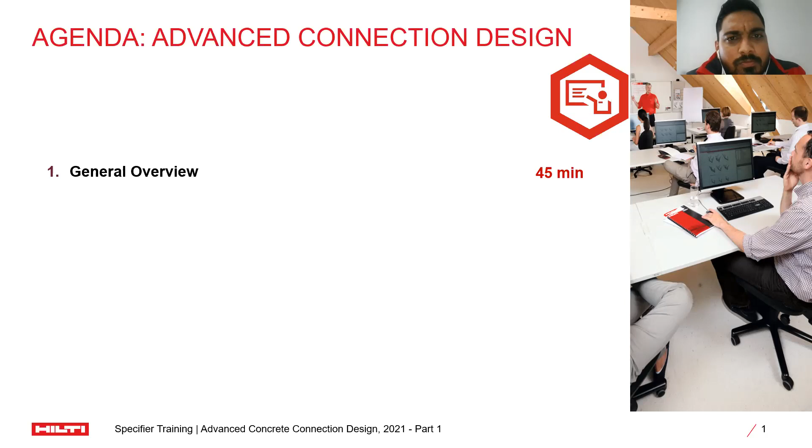To touch on what Paiman said, there's a code in the country now which deals with the design of fasteners into concrete. What I'll be covering today is part one of this overall very big and complex topic. The title of the presentation is Advanced Concrete Connection Design. This is part one, a general overview. An informal title can be Anchors 101. So before I start, I just want to tell you more about me and the company I'm presenting here on behalf of - why Hilti and who are Hilti.

I think it's a common perception in South Africa specifically that Hilti is known for power tools, and how are we involved in anchors and in connection designs and in codes and so forth.

I'm going to give you a quick background though, just to tell you where we came from and what we do. The company was created in 1941 in Liechtenstein, a tiny little principality on the border of Switzerland. It's still a family-owned business held by the Martin Hilti Family Trust. We like to consider ourselves one of the more innovative companies in the construction industry. We market products to building professionals, to the engineering community, and are now established in more than 120 countries worldwide. We have 27,000 employees in the company, of which 2,000 are engineers. I'm one of them, and we have a pretty unique sales model.

One thing you probably notice is that you walk into your typical hardware store and you don't see many Hilti products on the shelf. That's because of this direct sales model that we embody. It's about these kind of conversations, the introductions that we're having today, about understanding what our customers and clients' needs are and finding a solution to meet those needs. Some of you on the call might have seen us in and around sites, either our engineers or sales reps. It's hard to mistake who we are - we're generally wearing bright red shirts - but that's us in a nutshell.

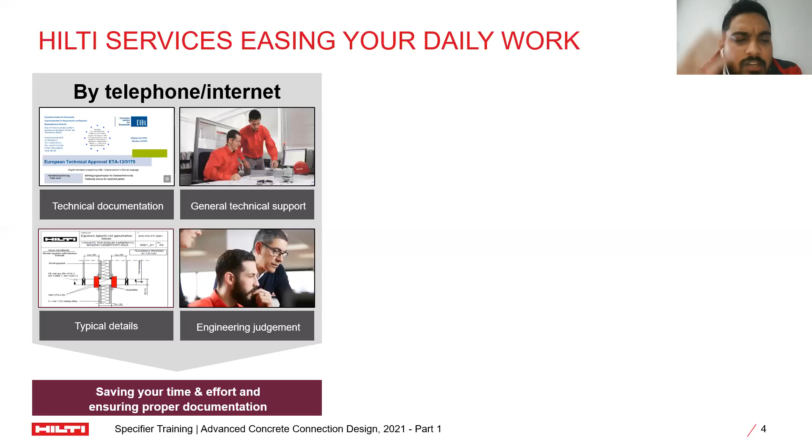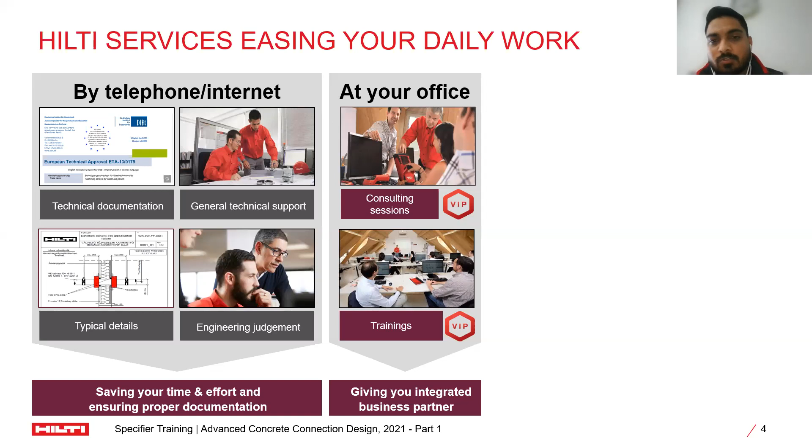Now, back to the engineering aspect of it. There's a few ways you can get a hold of us - telephone and the internet, you can go to our website, there's lots of information on there. This direct sales model leads to conversations that we can have with you at your office or trainings like these. And then on the job site, as I say, lots of bright red shirts offering support and training, and making sure that the solutions we offer are implemented correctly.

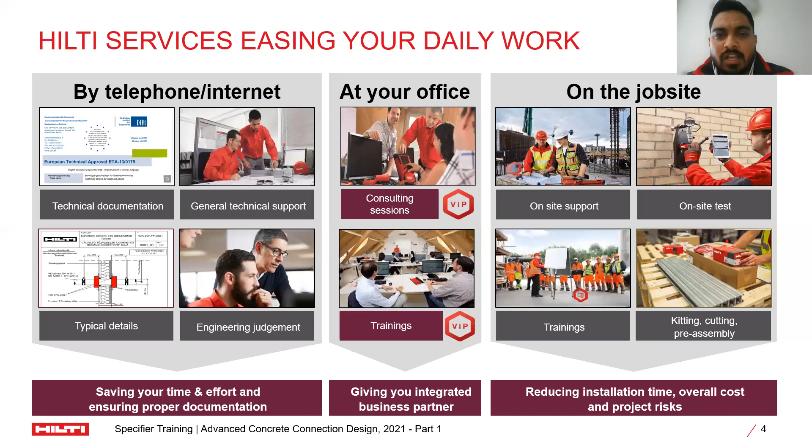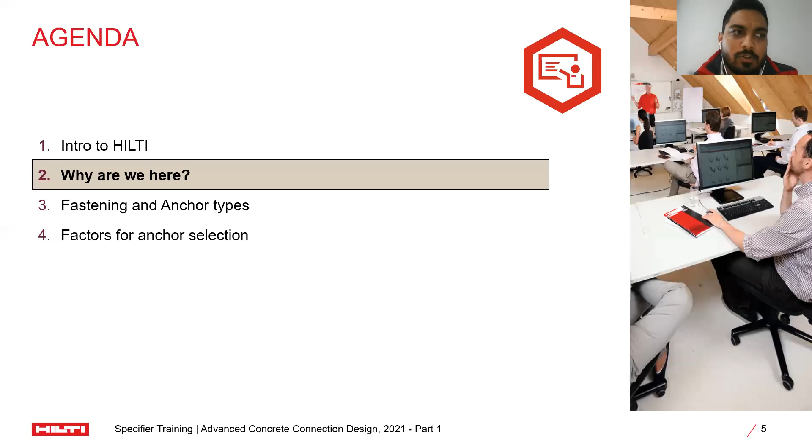Now, it wasn't us that pushed this code. This is actually something that came from a committee who's done a lot of hard work in the implementation of Eurocode in South Africa. They're still working on other parts, but how this specific Part 4 came to light was there's been a few failures, I would say, over the years from an anchor perspective that led to, unfortunately, injury, death, and damage. This resulted in this code being fast-tracked through the system and being implemented. The committee, as aforementioned, has been working for years to implement Eurocode. They roped in specific stakeholders in the industry - us, some of our fellow anchor suppliers - and together we collaborated and discussed what would be the best route forward. This code was then published in March.

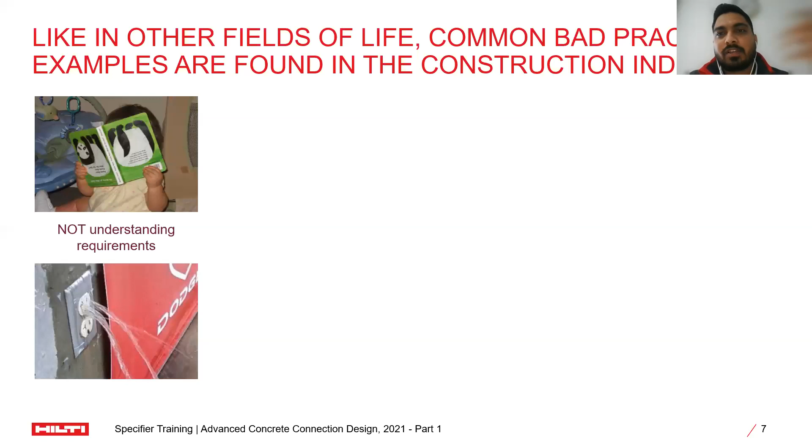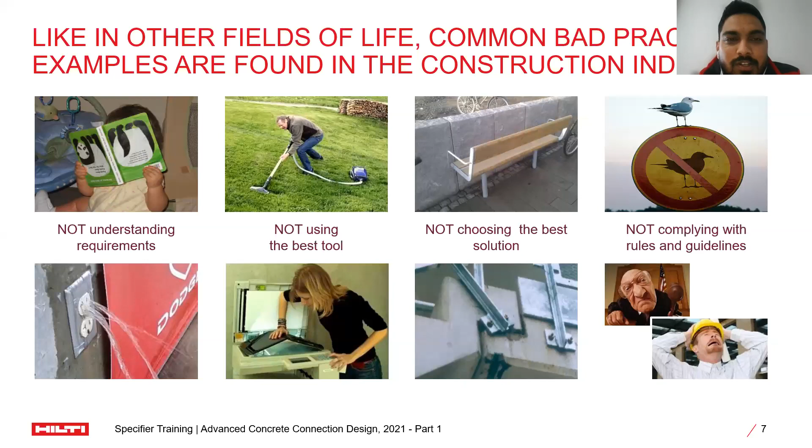Not understanding the requirements on site, not using the best tool, not choosing the best solution, and not complying with rules and guidelines for the aforementioned code. Now, none of these pictures were taken in South Africa, so I think we are ahead of wherever these specific scenarios occurred, but there's still a bit of things that we see on site that can be done better.

Now, with these many delegates on the call, I see there's over 400 of us here, and I'm assuming most of us are engineers, civil engineers specifically, and we realize that we can't make some of the mistakes that we saw in the previous page, because professional decisions do not allow doubts or mistakes, because the consequences can be very serious.

I mentioned before that anchor failure in the past has led to the implementation of this code, but we specializing in anchors at Hilti, I'm sure with you engineers out there, it's not just the anchors that you have to consider, it's everything surrounding that. It's the entire structure, and ensuring that we do things safely and do things per regulations is critical. Hence the reason that I wanted to start from basics on this topic.

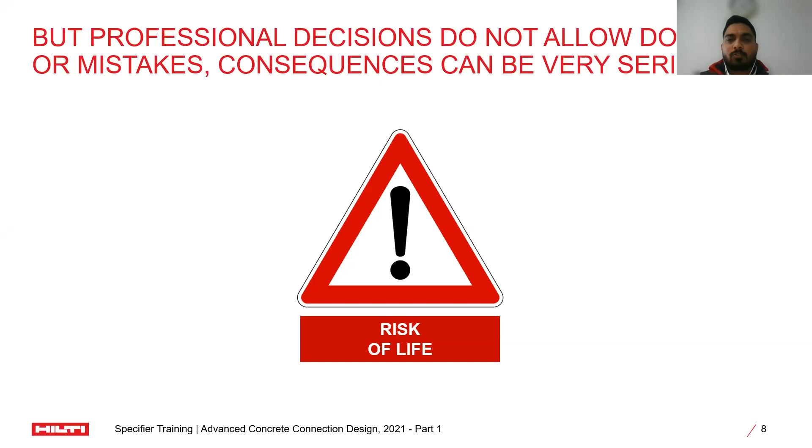Before diving into the code, it's important to firstly understand what are anchors, what are the different principles behind them, and how do we use them in the industry. So fastening systems can be split into two solutions. Cast in place installation, self-explanatory. The anchor or the fixture is cast in with the concrete when it is poured.

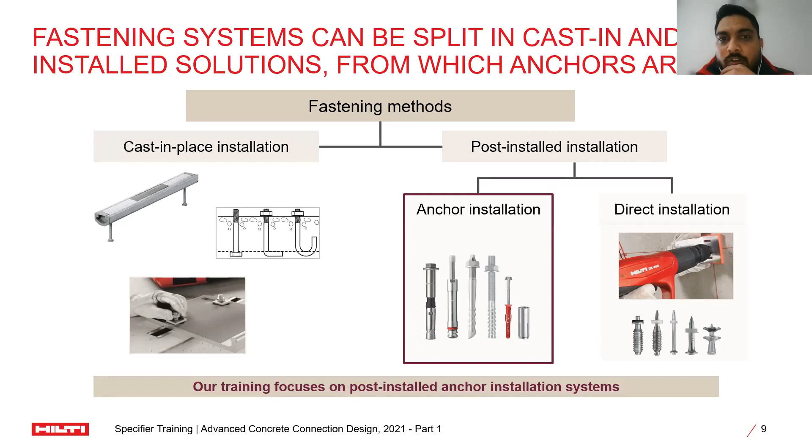And then post-install installation, which can be split into two criteria. Direct installation, typically your nail guns and what we at Hilti call direct fastening solution, where a fixture is shot into the base material. And then anchor installation or post-install anchor installation, which is the systems that we'll be focusing on during the course of today's session.

Now, most of you on the call would have looked at a data sheet for an anchor, whether it's a Hilti data sheet or any of the data sheets for any anchor out there. And you might wonder how these small, tiny little metal fixtures can resist such high tension and shear loads. Well, this resistance comes from three working principles: friction, keying, and bonding.

Friction: the tensile load is transferred to the base material by friction built up by the anchor expansion. I'll touch on that a bit more just now. Keying: during the setting operation, an undercut is created that transfers the tensile loads like a cast-in headed stud. And then bonding: the cured mortar mixture creates a bond between the anchor and the base material.

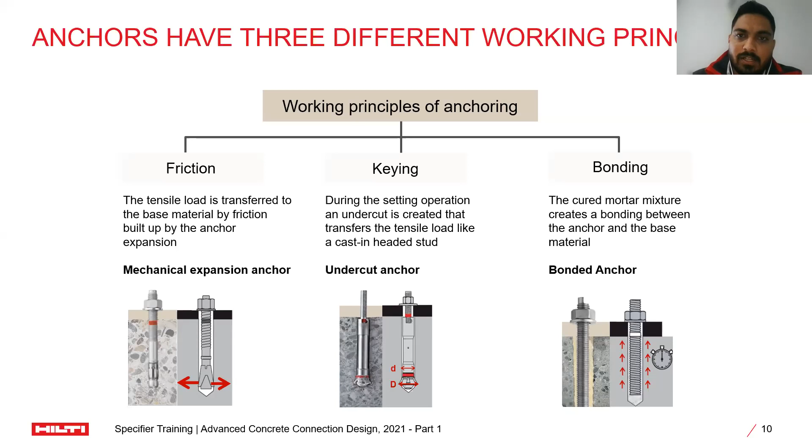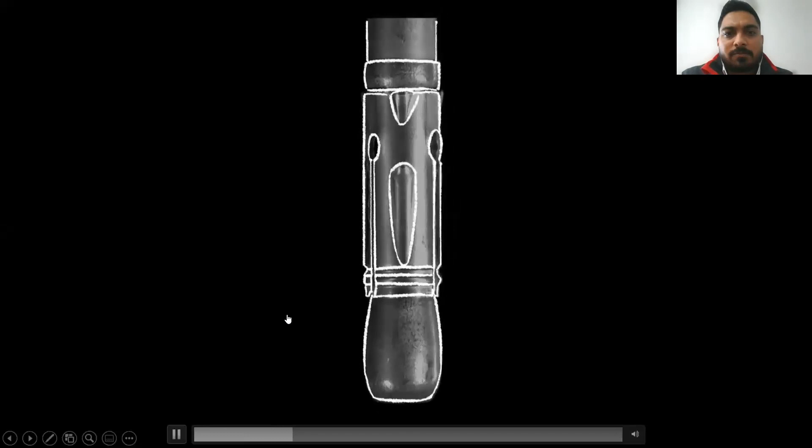Now I'm going to show you exactly how these principles work. I hope my video can be seen. Now, this is the friction principle. As you can see, there's a little metal element at the bottom of the fixture that expands as you torque this anchor. And with this expansion, it creates friction with the concrete, which gives this anchor its resistance.

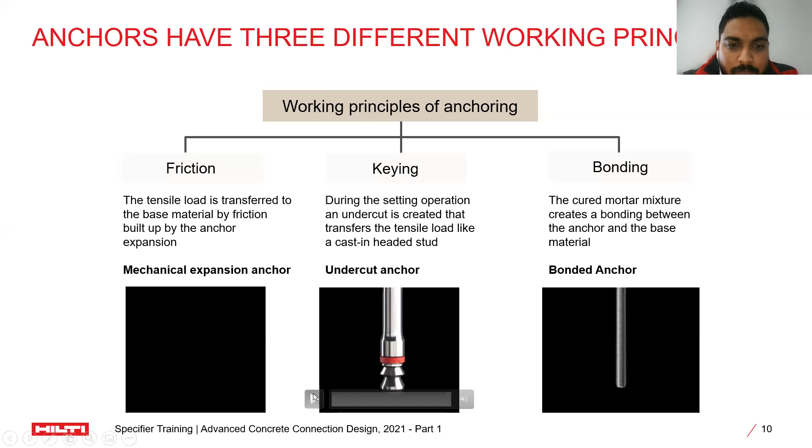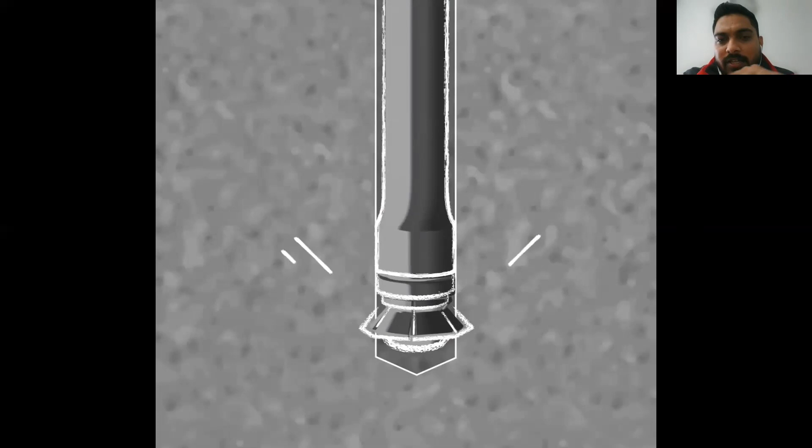The principle of keying, I'm playing a video now, has a sharper element attached to this anchor. And this sharp element, while torquing the anchor into the base material, cuts into the concrete and almost self-taps itself in there. And this keying effect gives it its resistance.

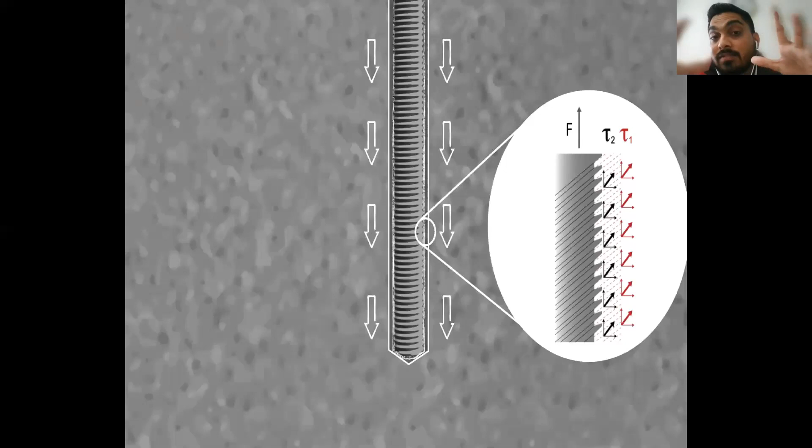And then finally, the bonding principle, which involves a metal element with a mortar. You first drill a hole, make sure it's clean, and install the mortar. And this bonding between the mortar and the metal element, and the mortar and the base material, gives the anchor its resistance. Now, two things I want to specify here before we move on.

We spoke about bonding and I mentioned cleaning. And this is going back to best practices and safe installations on site and doing the right thing if we understand it. A basic principle: the mortar bonds with the anchor, the mortar bonds with the base material. In order for it to bond with the base material, it needs to be cleaned correctly. And hence with any bonded anchor, whoever you're purchasing them from, you would see that cleaning of the boreholes is extremely critical, because dust can negatively affect this anchor.

It's the same on the friction side and the expansion side. I mentioned torque. The anchor expands with torque, and every expansion anchor that you might purchase or specify will have a torque requirement. If it's over-torqued, the anchor will expand too much and can cause damage within the concrete. If it's under-torqued, the anchor can displace, which could lead to failure. So a couple of safety requirements that you would need to look at when specifying and looking at these anchors on site.

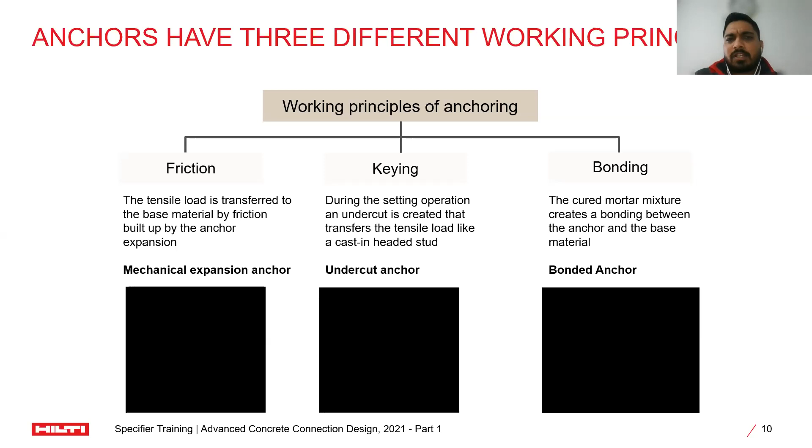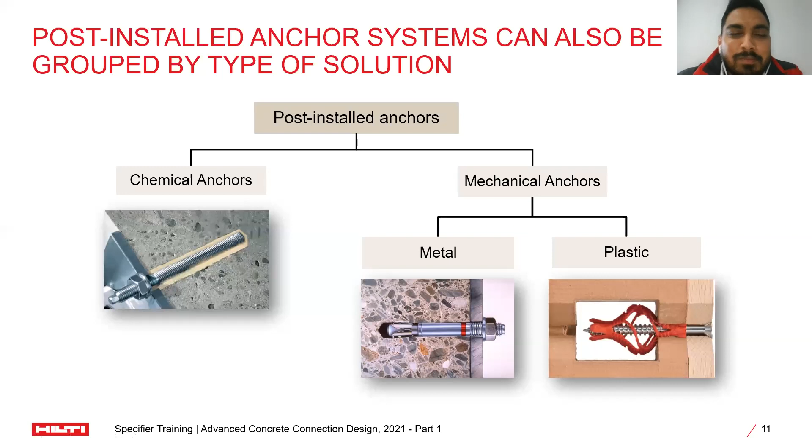Now we speak about these principles. We can also group them into two separate compartments. On the mortar side and with the bonding principles, we have chemical anchors, which is the common name out in the market there. Chemical mortar, chemical anchors, epoxy sometimes. And on the right-hand side, we have mechanical anchors, which can be split into two further categories. Metal anchors, more for your structural connections, and plastic anchors, typically non-structural, mostly to hang up wall frames and other stuff. Good.

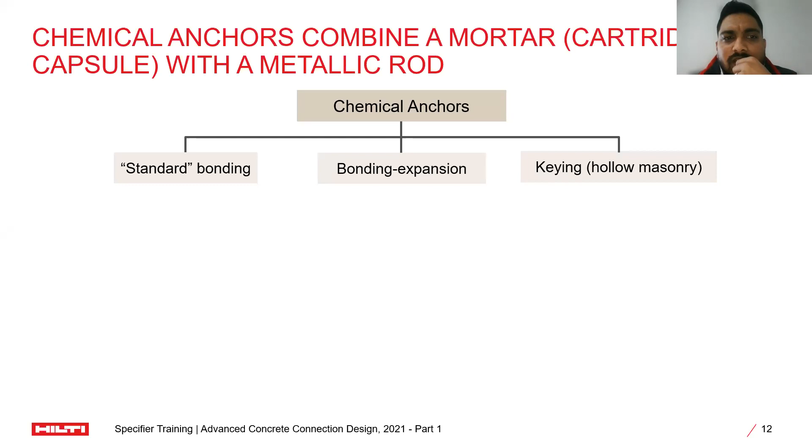Now, chemical anchors can be broken down even further. And I want to touch on this a bit more because there's further principles that we need to consider when assessing these anchors. There's bonding, right? We spoke about the fact that it bonds with the rod and the concrete base material. And this is almost like a technology in a way. There's a micro keying effect that occurs with specific chemical mortars. And this is based on the makeup of that mortar. It finds little crevices in the base material and it attaches itself to that. And through that bonding, you can get amazingly high load resistance.

Then there's bonding expansion. This is a fascinating principle and actually pretty new technology. You see the rod in these cases are not your typical threaded rods. What these anchors do is actually the rod itself, once torqued, breaks its bond with the mortar. And once the mortar is cured, when a tension force is applied, it pushes outwards. It pushes against the cured mortar. And this mortar in turn pushes onto the base material and gives it really good resistance.

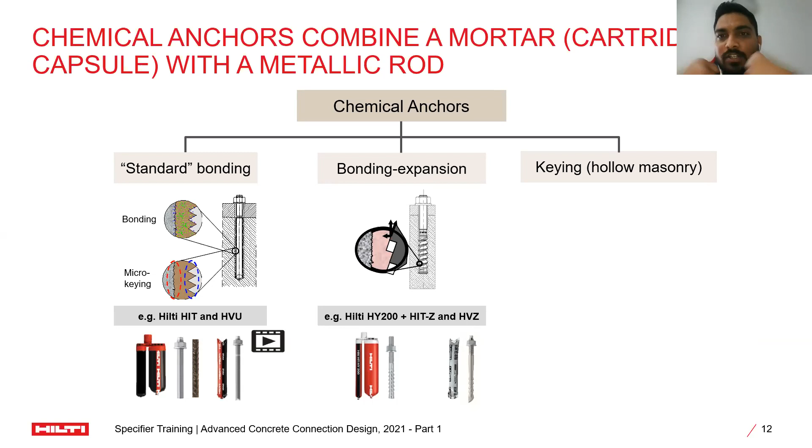There's a few anchors like this in the world, and these are the only chemical anchors, I should say, that you can actually use in an unclean hole, because it actually uses the principle of expansion and friction to give it its resistance.

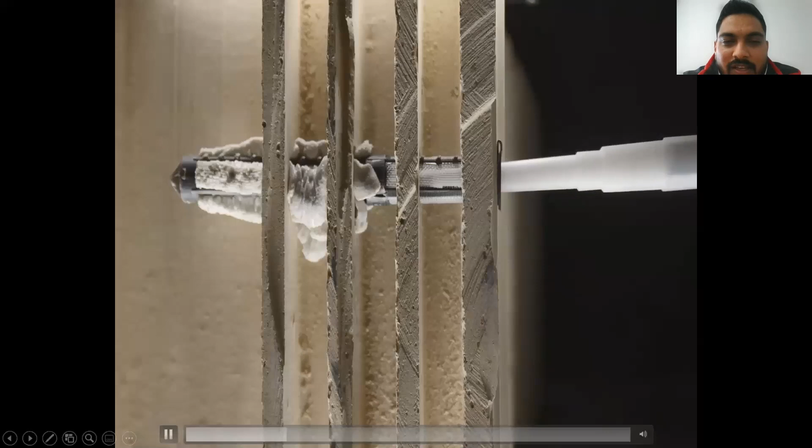And then finally, we have hollow masonry. I want to just show you a video of what this looks like, because this is a fascinating principle, because anchoring into masonry can be complicated sometimes. You generally need to consider the fact that there's crevices in there. And as you can see in this case, the anchor needs to be used in conjunction with a sleeve. And that sleeve is perforated.

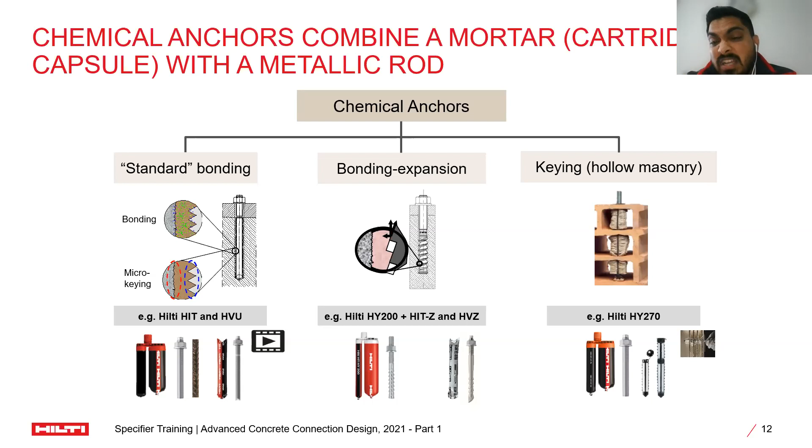When you install your mortar and apply your rod, the mortar protrudes out almost like a cauliflower, I like to say. And this gives it a keying effect in the hollow masonry, which gives it its resistance. Oftentimes you'd find if an anchor like this fails, it's usually the masonry that fails and generally not the mortar.

Good. Now, we've covered the type of anchors that we have out there, the principles that we have to use when we look at how they are installed in these base materials. Now, there's other influencing factors that you need to consider before you even start any design for an anchor. The first is the base material. I mentioned it a few times already, concrete and masonry being two of them. The second is the loads acting on the fixture. The third is the environment the fixture is being installed in, super critical. And probably the most important consideration, geometry. Where in this base material are these anchors fixed? How close are they fixed together?

Let's look at the base material aspect. So anchor applications can be required on several different types of base materials. There's many types out there. There's concrete, solid masonry, timber, natural stones, and each of these base materials might have different requirements, and that's due to a couple of things. The obvious one is that they're all different in composition. At the same time, they all have different resistances and different strengths. And this needs to be considered when selecting an anchor and when designing an anchor.

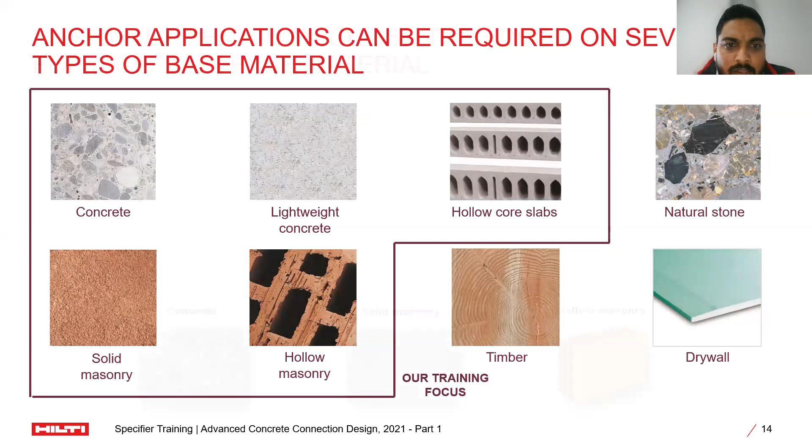I often like to say this, when it comes to anchor design, it's never a case of one size fits all. We need to take a step back, look at everything, and then we can start the design process. For the purpose of today's session, we'll be focusing on the concrete and masonry aspect of fixing. So, as I said, not a case of one size fits all.

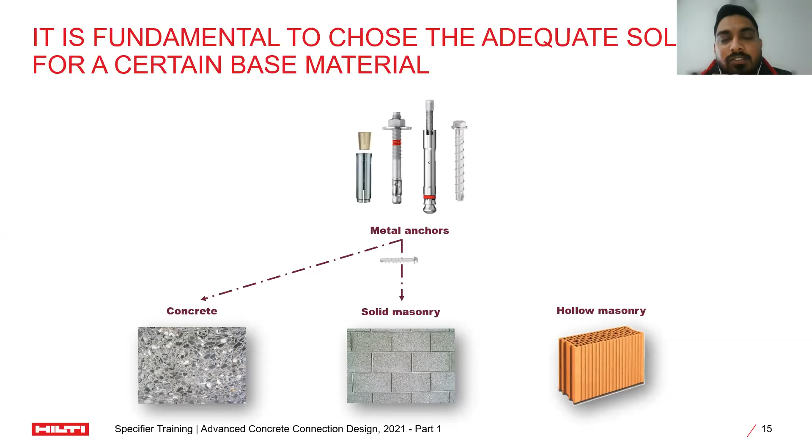In terms of mechanical anchors, they generally can only be used in concrete and solid masonry. Even in solid masonry, it's never ever recommended that an expansion anchor should be used. It can cause damage to the masonry, and certainly can't work in hollow masonry, because, as I showed you earlier, if the expansion element is sitting in the hollow part of the connection, it can cause some issues. Chemical anchors, on the other hand, based on their varying principles, can work in all three types of base materials.

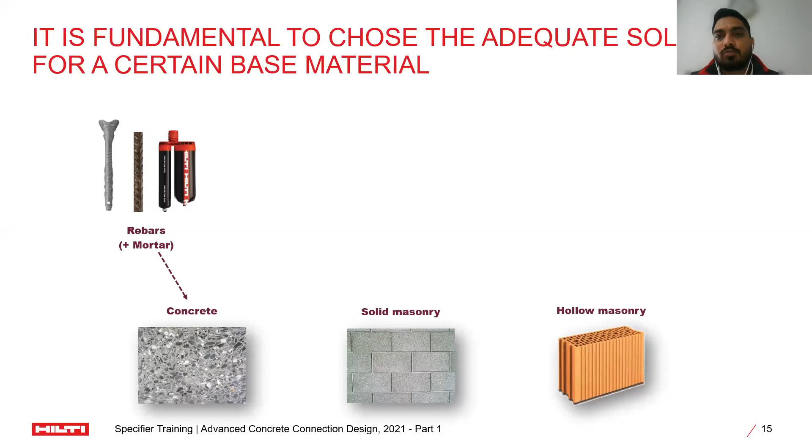And finally, rebar, an obvious one in concrete. On the topic of rebar, rebar principles and anchor principles are completely different. So from a design perspective, you cannot use the rebar principle to do anchor design. That's a topic for another day.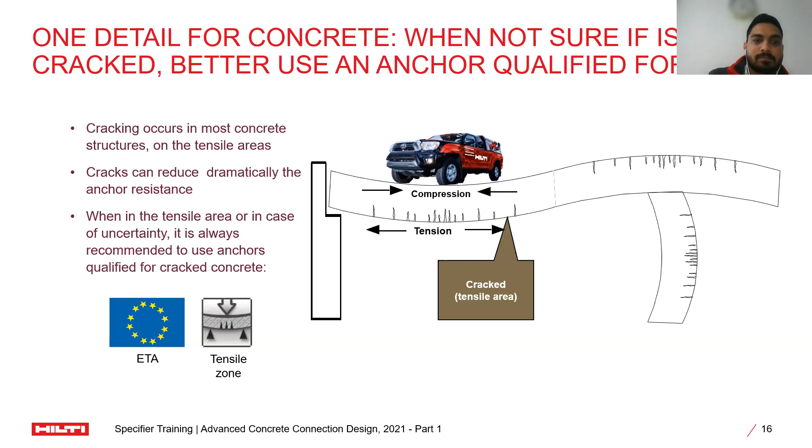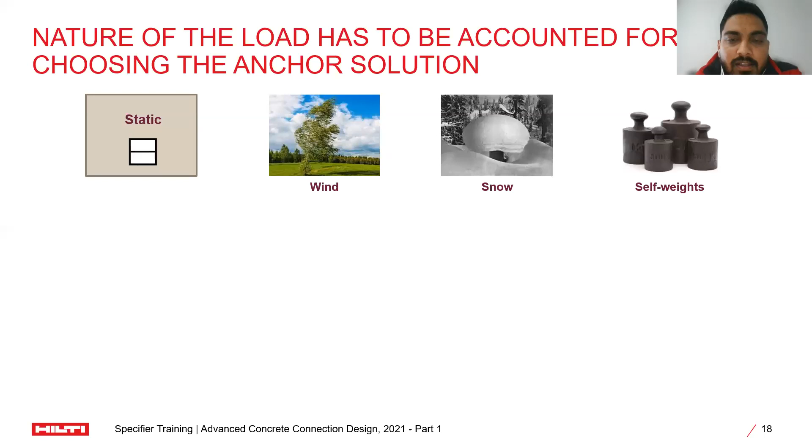Good. Now, the second influencing factor that we need to consider: loads. And this is a big responsibility of ours as engineers, to really understand the type of loads these connections will be exposed to. The most common ones that we allow for are static loads. It's wind, it's snow, it's the self-weight of the structure. And that's something that we calculate through our structural analysis. There are other loads though that need to be considered, and these are super critical in terms of choosing the right anchor for the right application.

Now, they can all be referred to as dynamic loads, and there are only specific anchors in the market that have approval for dynamic loads, and you would see that in the technical data or ETA of the specific anchor that you choose. Dynamic loads that we have to consider: seismic. If we're building in a seismic area, we need to take into consideration that the anchors also need to be considered in seismic design. There's shock: any barrier on a highway that could be hit by a vehicle is an example of shock, and needs specific anchors that have shock approval.

And another important one is fatigue. This is often used on the industry side of things. Machine equipment is a good example of an application where anchors need to be designed with fatigue approvals, or fatigue needs to be considered when designing these anchors. This constant movement of the machinery can lead to long-term creep of these anchors.

Finally, and becoming more and more important over time, is fire resistance. And the simplest way to explain this is that, firstly, specific anchors have approval and can be designed when it comes to fire. And just imagine a building where you've got heavy pipe supports needed for your sprinkler system. Fire starts and the sprinkler system kicks in, but the anchor fails. That sort of defeats the purpose and creates more problems than the sprinkler system putting the fire out.

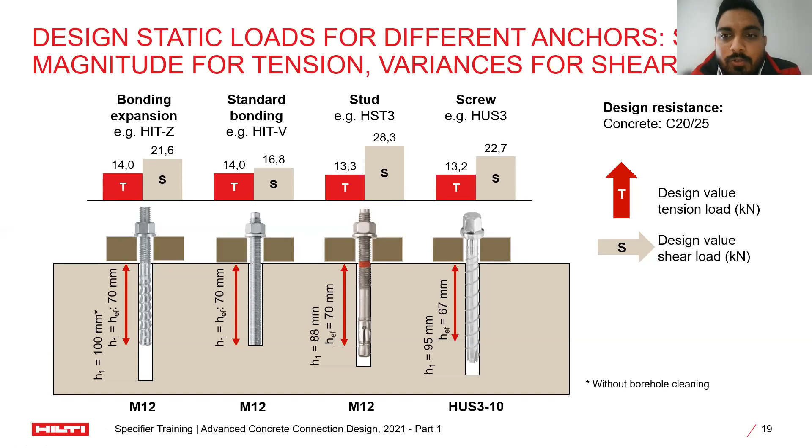And in South Africa, with the coastal cities and the coastal towns, this is a very apt topic. So there's typical ISO corrosion handbooks out there, and anchors follow the same criteria in terms of ISO requirements and the requirements in these corrosion handbooks. Internal areas where there's generally dry conditions, typical zinc coated anchors, or we call them galvanized in South Africa, are fine.

If there's a chance that these anchors can be exposed to atmospheric conditions or damp internal conditions, stainless steel must be considered. You see an example here of seating in a stadium. It's outdoors, it's exposed. The stadium could be Moses Mabhida right next to the ocean, and stainless steel must be used. The zinc anchors would not last their design life. And then finally, at the bottom, you see a swimming pool.

And I can tell you guys an interesting story regarding this one. There was actually a failure. I'm not sure where in the world, but we did an investigation on this. And the roof at the swimming pool actually collapsed. Stainless steel anchors were used, and initially they couldn't figure out what was wrong. The report showed, when we did our analysis, that the chlorine from the swimming pool affected these stainless steel anchors and actually corroded the stainless steel. So it's not always easy to figure out everything, but these things need to be considered.

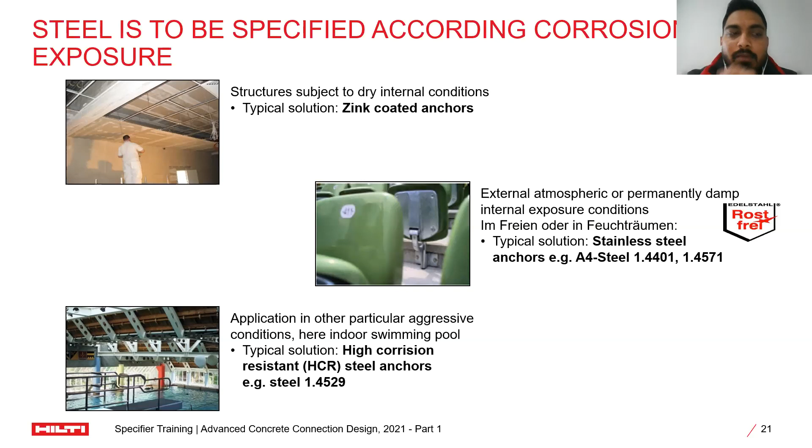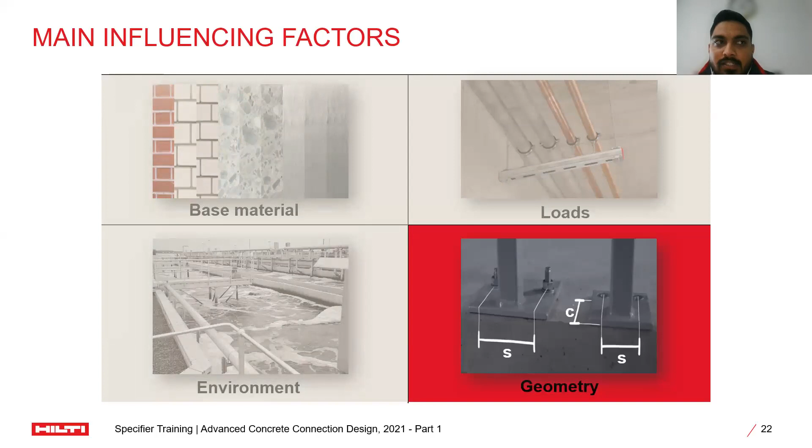Finally, as I mentioned before, one of the key criteria to consider is geometry. And this is where code is important, and I'll touch on that a little later. But a couple of factors that we need to consider when looking at geometry. The first one is the type of installation. The second one is the thickness of the fixture. This is typically your base plate, because if you're using mechanical anchors, which come in standard lengths, the thickness of the base plate can affect the embedment depth of that anchor.

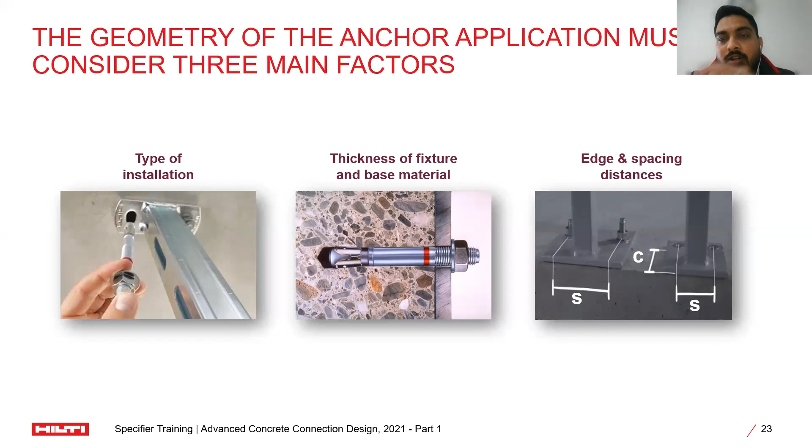And then the third one is edge and spacing distances. I touched on this earlier, and this is extremely critical. And when we get to the point where we're doing designs, you will see how this affects your design from a load capacity perspective.

Now, I want to touch on something, and this is something where we're moving more towards the code now. We've done all of this background research in the environment. We looked at the type of loads. We looked at the base materials. We got a good understanding of it. We're now getting into the actual designs.

And the reason an anchor design is not easy to do by hand is because each of the following failure modes needs to be calculated when doing that design. And each of these failure modes is in SANS 51992-4, Eurocode 2 Part 4. These are all designed for.

The first one is concrete cone failure. It typically occurs when the embedment of the anchor is not deep enough to resist the load required. You'd find that a huge cone of concrete will pull out if this fails. It can sometimes occur when the anchors are also spaced too closely to each other, so it creates a huge influencing factor on the concrete and results in a massive cone failure.

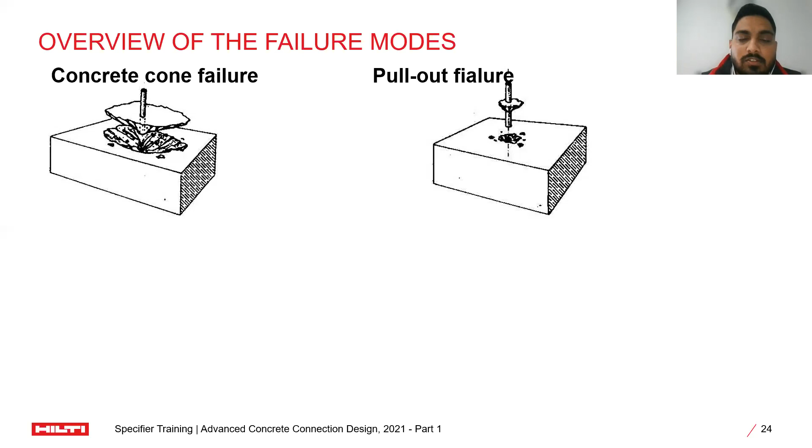The second one is pull-out failure. Again, it could be caused by the chemical anchor not being embedded deep enough to resist the load, and the anchor itself pulls out. So the concrete is fine, but the anchor pulls out.

The third one is edge failure. Again, through geometry, an anchor can be too close to the edge or spaced too closely together, and a shear load or a shear load combined with a tension load would result in edge failure. This is actually quite a common failure mode in the industry.

The next one is steel failure. Instead of using an M20 anchor, we might have used an M10 anchor, and the shear loads were pretty high. That might result in steel failure.

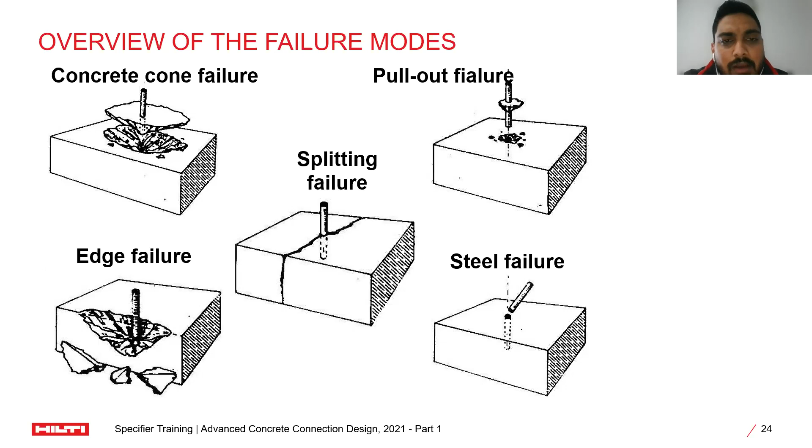Splitting failure generally occurs when the base material is not that thick. If you're only embedding into a 100 mil thick base material or 100 mil thick slab, it can result in splitting of the concrete. And then one of the shear failure modes is pry-out failure, where the concrete behind the anchor actually fails in the direction of the shear force.

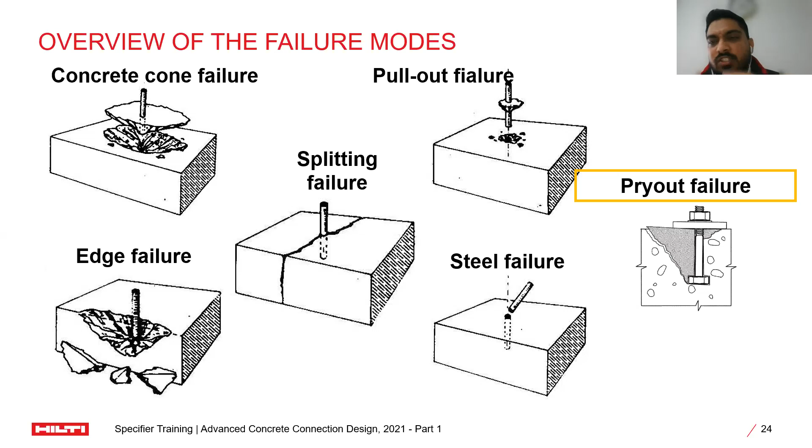This is not something that we're going to have enough time to go through in detail in this session. This is when we go through the design itself in the code, which is Anchors 202 or 102, but we'll get there eventually.

Now, I touched on a few criteria that we have to look at. I touched on many different aspects that are pretty general that we have a job to do as engineers to make sure that we can cover. And I also touched on the fact that there's a big 140-page code that we need to understand when it comes to doing these designs. I highlighted safety and failures.

And the truth is, it's not just safety and failures that we see out there. Safety is critical. It's the most important thing when we're doing any design. And looking at these typical applications here, some of them we really have to consider safety as being pertinent: facade fixings, for example, and steel and metal in construction.

But another thing that happens out in the industry is that, based on our inclination to be safe, we can over-specify. What I mean by that is there might be typical balustrading applications, for example, or typical small canopy applications where we would specify an M20 anchor when an M10 anchor could have been more than sufficient if we had designed correctly.

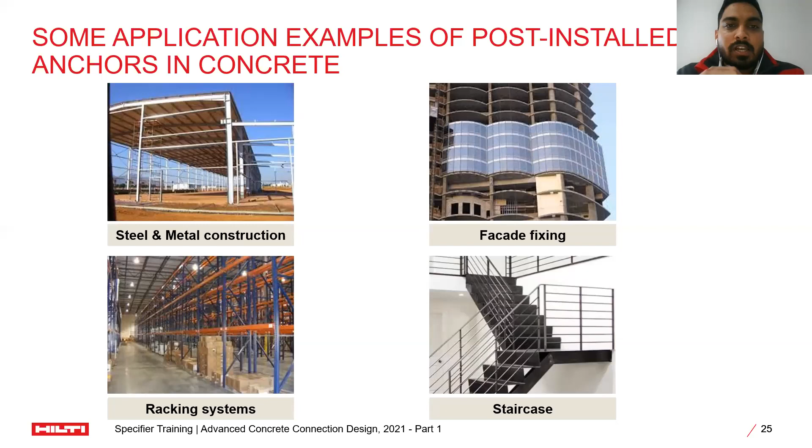So as I say, if I compartmentalize, safety is critical. The code provides safety, but at the same time, it also gives us a chance to optimize our designs so that when contractors purchase these anchors, they're not spending more than they should. We make our projects a lot more cost effective, and everyone's happy at the end of the day. Good.

Now, a deeper dive into the design part of it. There are 3 essentials for any anchor design out there. Our code, which is based on Eurocode 2, is the first aspect. It's a design method. Remember, prior to March this year, we had no code in the country, and it was our responsibility as engineers to make sure that we're using the right design method when doing the design. We now have a code, so we have something that we're regulated by.

So the design method is critical, but together with the design method, you need technical data. And this is not technical data, for example, that Hilti can provide to you, because we can test our own anchors and tell you that it's the best anchor in the world and give you a stamp of approval from Hilti.

But in order to do a design, that's actually not good enough. You need an anchor that's approved by a third-party organization, an institution that does these tests in accordance to specific standards, and they will tell you whether this anchor is seismic approved, this anchor is approved for cracked concrete, and the design load that this anchor is safe to use with.

And that's called an ETA in this case. And in South Africa, we are now obliged, in line with Eurocode 2, to use anchors that have approvals with the ETA. And I'll be honest, not all Hilti anchors are approved by the ETA. It's not a good thing, but 98% of them are.

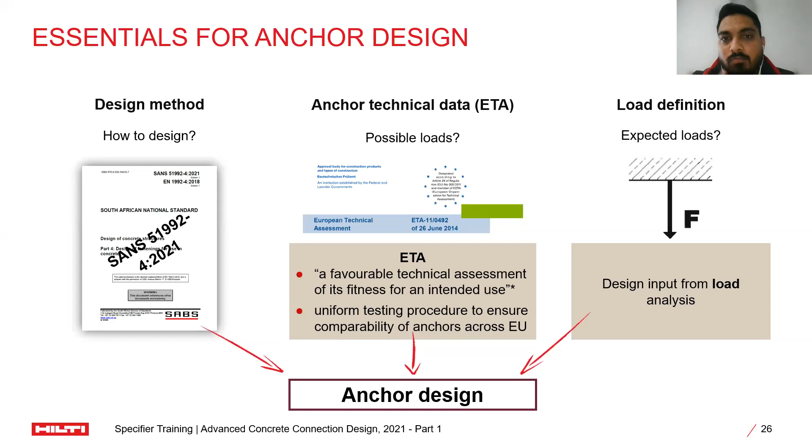Now, the final thing that you need when doing a design is load definitions or expected loads. And this comes from you as your engineer. You get your loads from Prokon and the various software. You find out what the reactions are at that connection. And then using the information from the ETA, following the design method, voila, you have your anchor design.

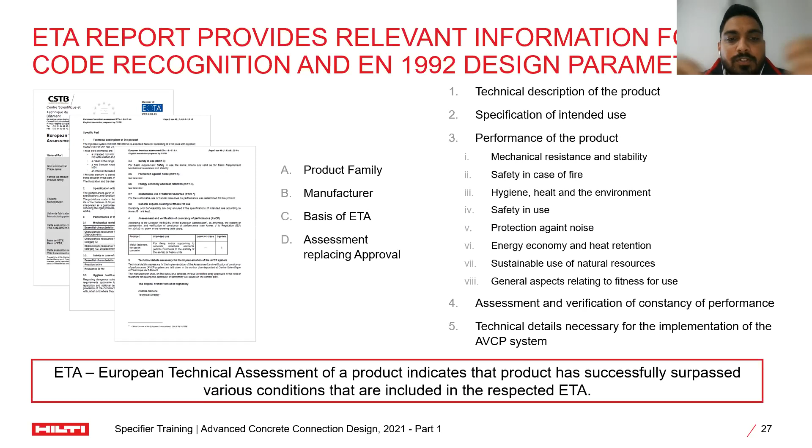information in our technical data is a consolidated version of the ETA. Don't add anything different in there. I'd rather send you guys ETAs. It's a lot more comprehensive, but it has all this information in there that gives you specific insight into what these approvals have. And then finally, as I said, and to repeat myself, you have a trusted source of information that you can use. Good.

It's not just ETAs though. As I say, Eurocode 2, which is a great code that's been adopted here, but the American code, for example, ACI 318, if that had been adopted here, we would have to use ICC-ES approved anchors. So that's the North American institution that does these tests, and they issue these certificates based on the approvals on these anchors.

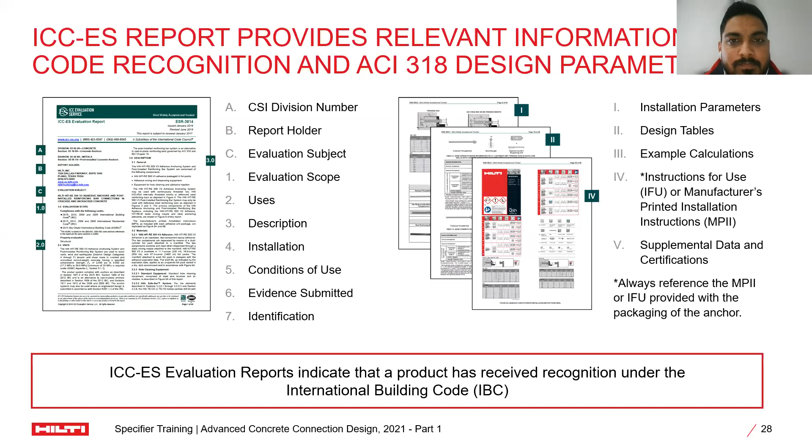And the big discussions we used to have sometimes is around safety and who's responsible for what, and where does the supplier's liability lie, where does the engineer's liability lie. With code and in our documentation, or our local building documentation, yes, the suppliers take a lot of responsibility if there's product defect. But from a design perspective, National Building Regulations and SANS 10400 both speak to the competent person doing a rational design. And that moves liability to the individual who's going to specify the solution in the drawing for the contractor to install.

And this needs to be done safely. And that's where I'm really, really happy that code is now around. Having this regulation, it means that there's a standard across the country that everybody can use and everybody can be guided by. I mean, in university, I don't recall, I don't know if the syllabus has changed, but anchors were never really touched on as part of the syllabus. We were focusing on bigger things like reinforced concrete and structural steel and structural analysis and so forth. Anchors are a very small part of the overall big picture, but safety-wise, it's one of the most important parts.

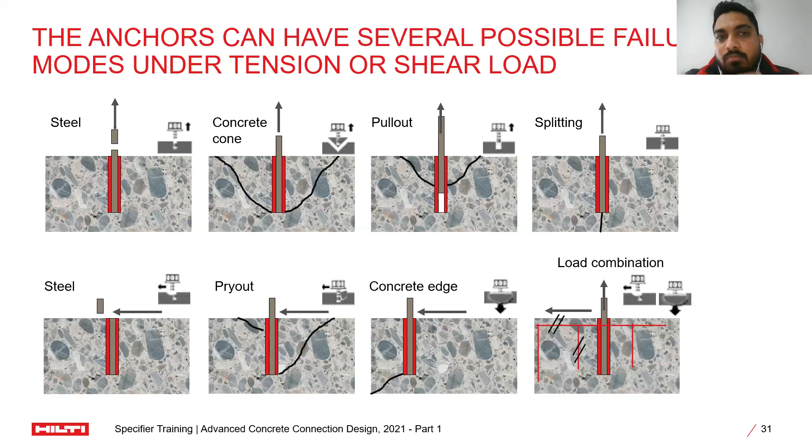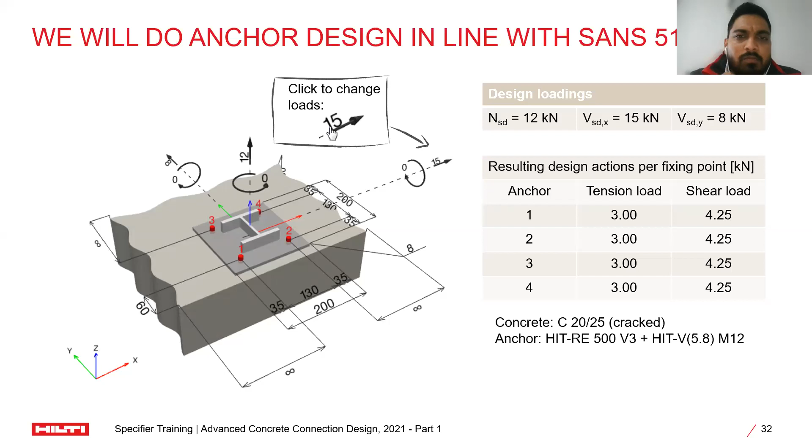If you had to do an anchor design by hand, you're looking at 2 to 3 hours to do it, and we obviously don't have that time in this session. What we'll use instead is software freely available, which lets us do designs, review them, and pull out extensive reports, all in 10 to 15 minutes. The software is based on Eurocode 2 Part 4, so there's no black box feeling about what information you're putting in. The report references specific codes in Eurocode 2 Part 4, and that'll form part of our follow-up sessions.

Once we do this example together and complete the actual design, we'll go into more detail on the various failure modes and the utilization of these anchors against those failure modes. I don't want anybody to feel scared, lost, or confused leaving this session. I'll share some links afterward so you don't feel intimidated by this topic. It might initially seem complex, but it's pretty simple principles and methodology, and there are useful tools out there to help with these designs.

I'll say again, this isn't just a Hilti thing. We've got software freely available on our website, and so do many of our fellow anchor suppliers — they also have these materials available. The big thing for me is education on the code, you as an engineering community feeling comfortable designing and following this code, and ensuring we have safe connection designs out there.

I see Sanjay has made a comment about a new product from Hilti that's been launched, where you don't need to clean holes for anchoring. Is there anything else you want to add? I see Erbert has provided a response — I'm not sure what he said, but yes, there is such a product. It's called the HIT Z rod, one of the few chemical anchors in the world, as I mentioned before. Let me take you guys quickly back to this slide so we can touch on that.

It's this principle here: a very specific rod used with the mortar. Instead of using the bonding principle, it uses a bonding/expansion principle, where the rod itself actually breaks its bond with the mortar, and the way it's designed pushes outwards, creating friction between the mortar and the concrete element of the base material. Hence it doesn't matter if the base material is dusty — you're not depending on the bond, you're depending on the expansion.

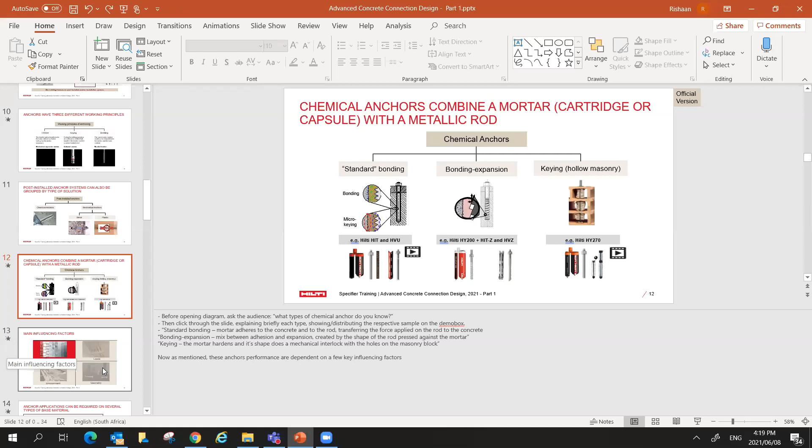Hope that answers the question. Okay, Sid is asking: what is the best way to deal with clashes with rebar?

That's a fantastic question, and honestly, there's no solution out there that an engineer will be completely happy with. The first thing we can do is see if we can move the position of the connection — if we can do that, it's amazing, because you avoid destroying any rebar in the concrete and still have a safe connection in place. But if you design an anchor and arrive at the required embedment depth for it to resist your loads based on your design, you need to meet that embedment depth. I've often seen people cut off rods and go with a shallower embedment depth to try and save the rebar that's in there.

But that now gives you an unsafe design. So first thing, if we can move the connection, that's first prize. If we can't, we have to make a judgment as an engineer whether we cut through that rebar, and I know engineers hate hearing that. There are drills and coring rigs available that you can drill through, but it all comes down to geometry and safety. If you have a required embedment depth, unfortunately you have to meet it.

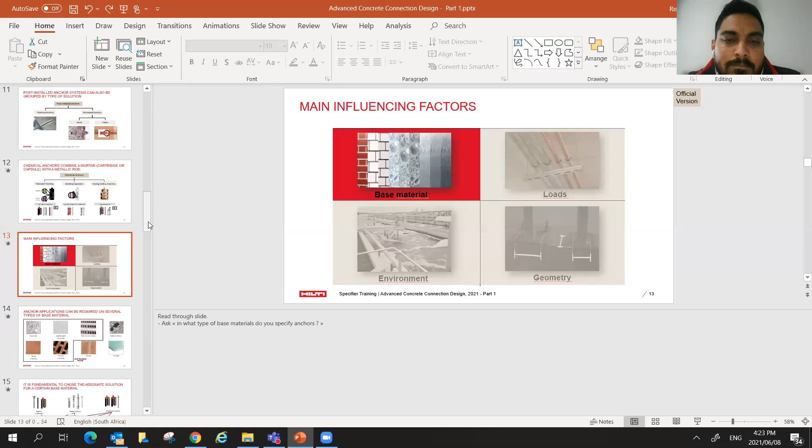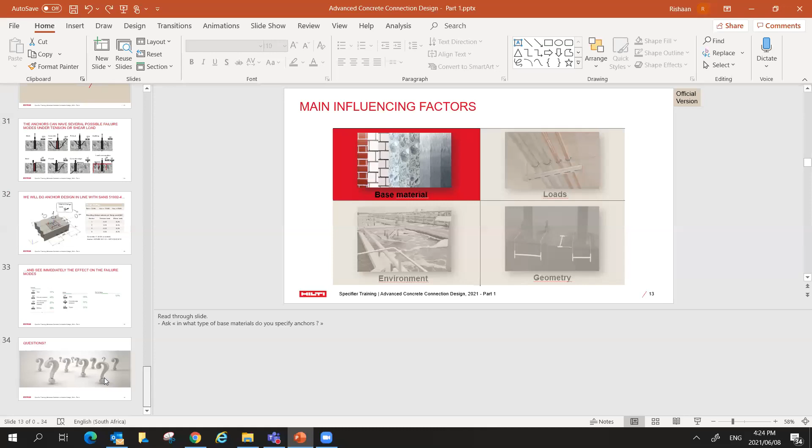Next up we have Sanjay, who's asking if your anchor is well within the rebar cage, do we need to consider the edge distance criteria? Yes, edge distance will always need to be considered.

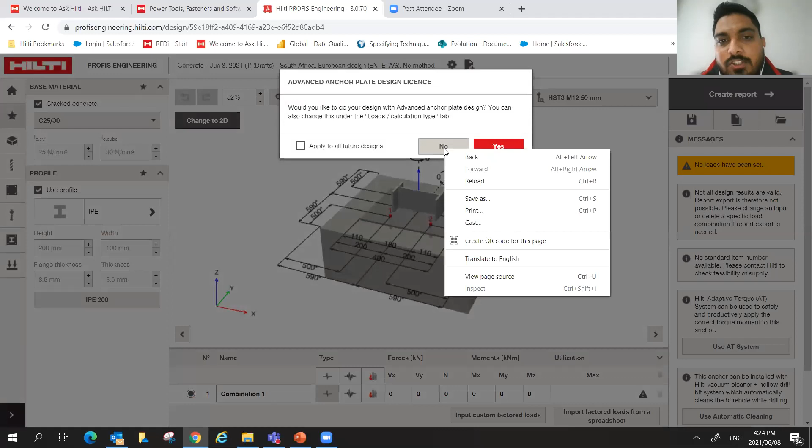JB, I'm going to quickly just show something here. So this is sort of what the software looks like, and when you design, regardless of where the anchor is, if it's positioned close to the edge, the minimum edge distance has to be adhered to. It's part of the code, it is there. Even if there's sufficient reinforcement, the minimum needs to be adhered to.

Ilana Forbes has asked, does the code cover the fire resistance of the anchors, or how to ensure you achieve the required minutes? Yes, and that's a good question, a great question, and we can dive into that in future sessions. But the code will cover that, and it's more covered in the ETA information and the technical data of that specific anchor. So when you're designing for anchors for fire resistance, understanding what the requirements are from a fire perspective is the first thing, and then using that information together with the code, you can do a design. You can actually do it on the software.

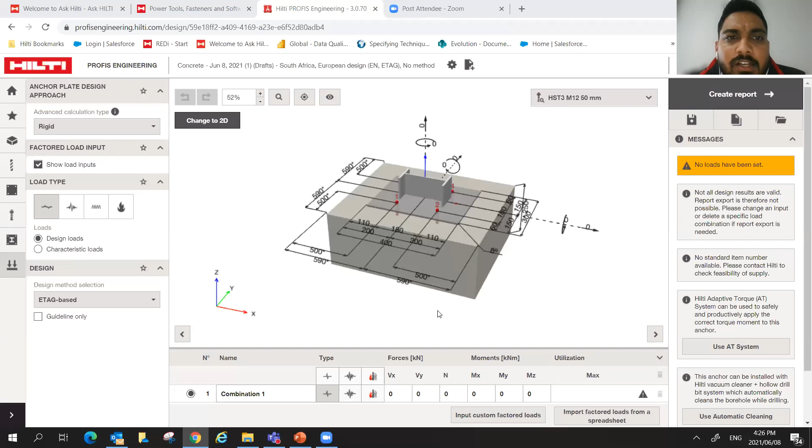Tabanga's asked, how does anchoring affect the structural integrity of mass concrete? If I understand the question correctly, if we're looking at anchor failures, it shouldn't, right? It's generally small diameter anchors placed in large, huge concrete elements. The one time that I could see where anchoring can affect it is if there's a splitting failure. If the concrete is really thin and we're trying to fix into that concrete and we then apply a load to those anchors, it could result in splitting of the concrete. But all in all, it doesn't affect the integrity of the concrete, unless there's failure, and failure generally comes from not doing the design.

Hannes Lewis has asked, when must one fill the gaps between bolt and hole in plate with solid epoxy? Wow.

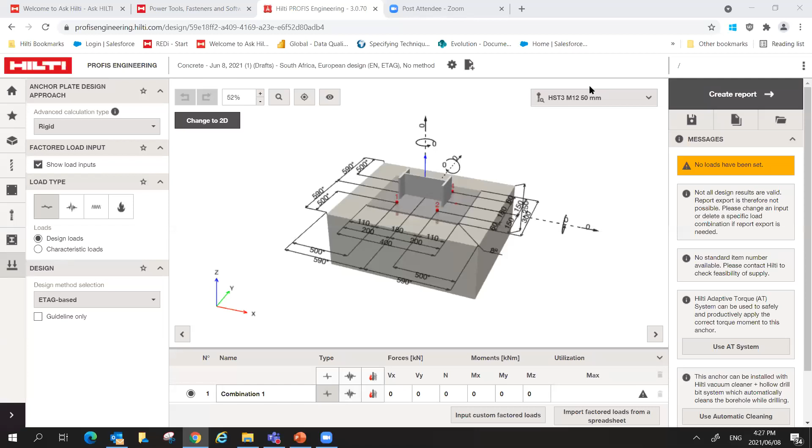For example, in a 4-bolt connection under shear loads. What a question. That's amazing. Thank you for that question. And I hope, if not a Hilti engineer, an engineer from another anchor supplier spoke to you about this concept. It's a fascinating concept, and I'll use this model to show you.

So any base plate, if you have anchors in there, you generally will have a bigger hole diameter in your base plate than the size of the anchor. For example, an M16 anchor, you'd want to have an M18 hole or maybe even an M20 hole on your base plate, because you're going to move this base plate around a little bit to make sure everything fits in there. And by having that, you're going to have a void between your base plate and your anchor. And for tension loads, that wouldn't matter much because those anchors will be bolted down onto those base plates.

But for shear loads, you could have displacement of the base plate if the anchor is not sitting at the center of that hole, right? The shear force will be applied to the steel member. The steel member then transfers the load to the base plate, and the base plate needs to transfer the load to the anchors. Now, if the anchor is not sitting flush against the base plate, then you could have some movement there which could be detrimental.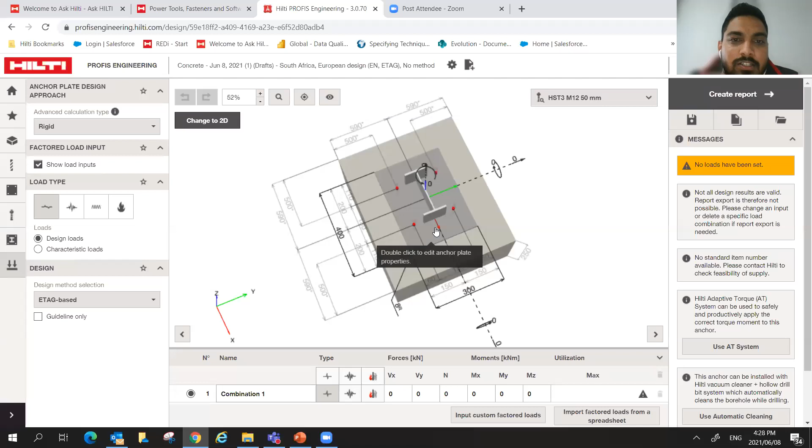So to answer the question, whenever there's a shear load and you have more than one anchor on the base plate, you need to fill those holes between the base plate and the anchor to make sure that the forces are transferred uniformly from the base plate onto these anchors.

Trevor Duncan is asking, does the code make allowance for anchoring with competent rock? Is there a definition on what competent rock is? Sorry, something's happened here on my screen. Or is it a requirement for geotechnical specialists to confirm? Great question. Rock is one of the enigmas of base materials. That's the challenge with rock, right?

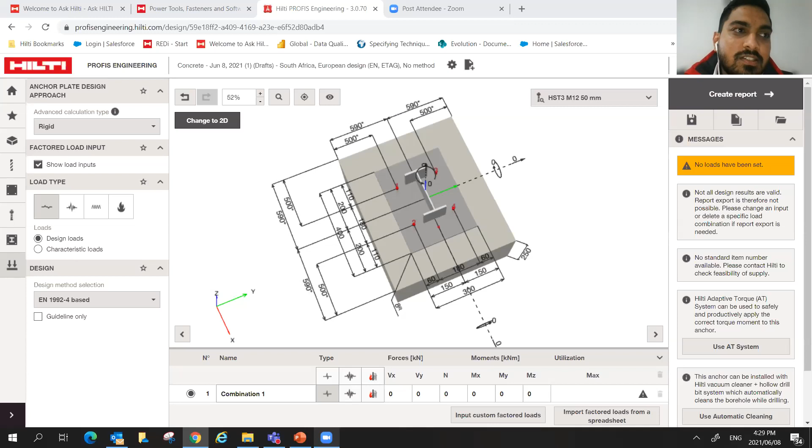So we spoke about different base material, but 25 MPa concrete is 25 MPa concrete anywhere in the world. And as I said, each anchor needs to be sent to the ETA. And what they do is they will install these anchors in 25 MPa concrete, 30 MPa concrete, and they will give you data which will be relevant throughout the world. The challenge with rock is it differs across the world. And the code does not cover it just purely because there's no ETA for anchoring into rock.

What we suggest comes down to engineering judgment. We have done some tests in specific rock types, which we can share. If we don't know what the rock face is, we go out to site and we actually install some anchors and do some pull-out tests. Based on that, we can judge a safe design resistance, and together with the engineer, make an engineering judgment on what's safe and what's not safe. So best solution, go out, install some anchors, do some pull-out tests, check what the design resistance is, apply some safety, and then we can design safely that way.

Okay, next up is Rowan. He's got quite a comprehensive question regarding holding down bolts. Holding down bolts for canopy warehouse structures exposed to uplift wind effects. The previous SANS codes specify the use of cast-in holding down bolts with anchor plates. We have used Hilti chemical anchor bolts for small canopy structures and pipe supports. How would we go about selecting a suitable anchor for large warehouse structures, for example, 60 by 30 meters? Are these specifications provided in SANS 51992-4/2021?

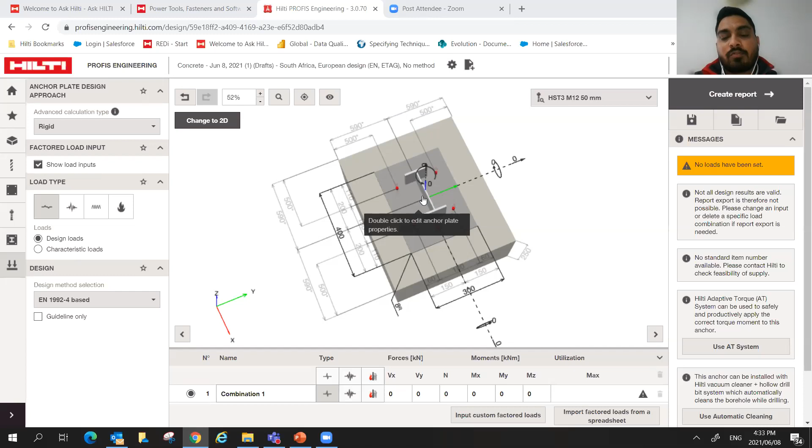So long story short, the code is for post-install anchors. If the loads are too high, then don't use the post-install anchors and stick to what's allowed, which would be the holding down bolts. And I've done many designs that unfortunately we couldn't provide a solution for due to the high load requirements. And again, as you can see, you can choose Eurocode 2 on the software. This will give me all red on the right-hand side and tell me this doesn't work, the tension is too high or the shear is too high, and you're not going to find a solution.

Alan Fodden is asking about in-situ testing the pull-out strength of a previously installed anchor using a torque wrench. Have you got the questions in front of you, or can I just continue reading them? A torque wrench on a nut and bearing onto the concrete surface is practical and simple. Do you have any rules to apply to this test?

I do not fully understand the question. I'm going to try and find it here. Yeah, it's Alan Fodden. You can see we've got many questions lined up for you still. Oh, there you go. Okay. Yes.

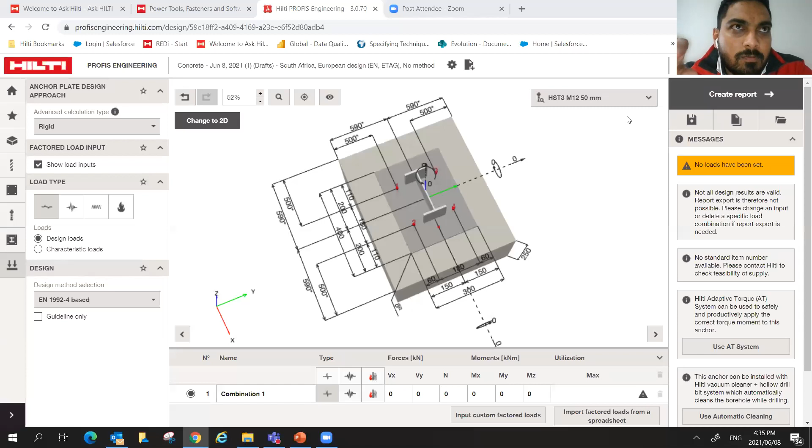Okay, so this is an interesting question, Alan. If you look at most technical data sheets, there's specific torque requirements for an anchor. For mechanical anchors, there's a set torque. I'll give you an example. I know a stud anchor has 80 Newton meter torque for it to be set perfectly. So to try and test this anchor by using a torque wrench could actually damage the anchor itself and cause some damage to the concrete because you're over torquing it.

In the case of chemical anchors, there's no real torque requirement, but there's actually a torque limit. It's all in the technical data or the ETA, and if you exceed this specified torque, you're applying much more tension, and you're also causing the bonds to break between the chemical and the wall. I wouldn't recommend this method of testing. There's other rigs that do pure tension pull-out tests, connected to a hydraulic gauge, and the gauge will give you the tension much more accurately.

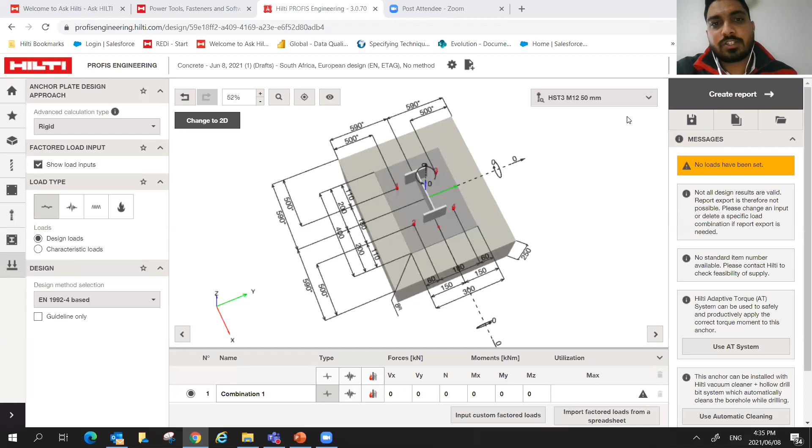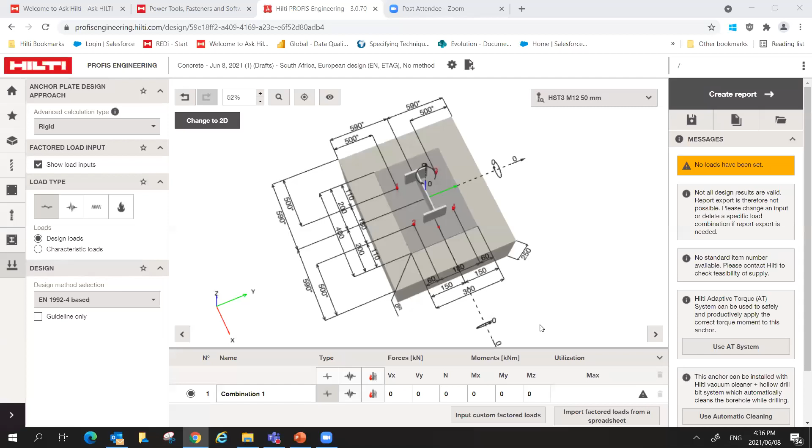Ed Hennessy has asked, what about eccentricity on the HD bolt from the gap between the concrete and the underside of the base plate? In other words, the packers that make up the level differences between the underside of the base and the top of the concrete foundation. Good question, and in the code it's referred to as standoff. So standoff between the base plate and the concrete. And this does affect your anchor design. We can check that here. We can add standoff with clamping, without clamping, and with grout.

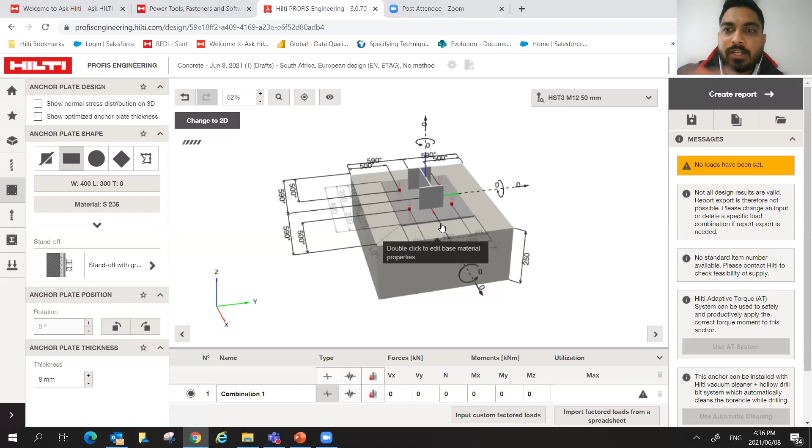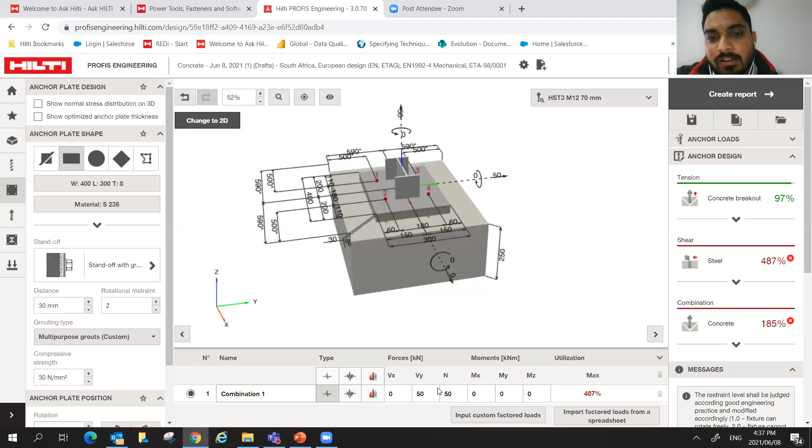And when we do an example, and feel free to reach out and we can chat about this, when you start applying loads, especially in shear, you'd find because of the standoff, there's a moment created on the underside of the base plate and the anchor and the concrete. And due to this moment, it results in substantial differences in the resistance that it can have. So as you can see here, I'm adding a 50 kilonewton shear load to this connection with a very high standoff of grout, which is 30 mil, and it completely fails. If I remove the standoff, it moved from 487% to 125%.

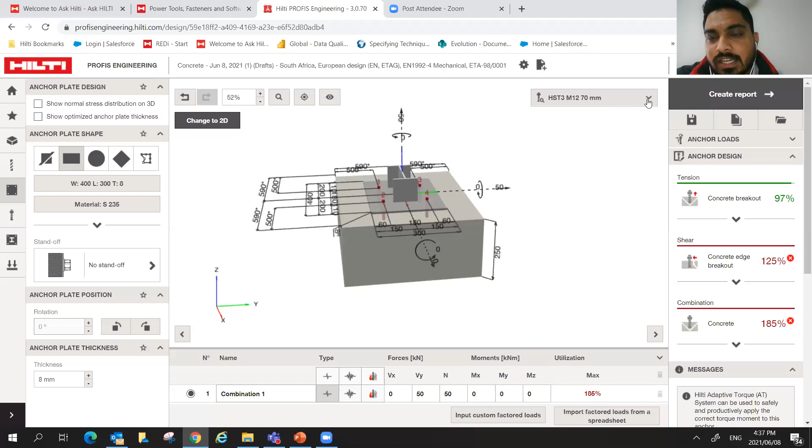Listen, we can play around with the anchors. This is an M12 anchor. I can make it 16 mil, but the standoff has a big effect. It's because of the moment created at the underside of the base plate. And when you design it, you have to consider standoff.

All right, Rashawn, I'm going to take our last question, which is from Dane. Does the code deal with dowel action and anchors under shear? In other words, additional bending stresses? Does it allow for reduced dowel action if the gap between the base plate and base material is filled or grouted?

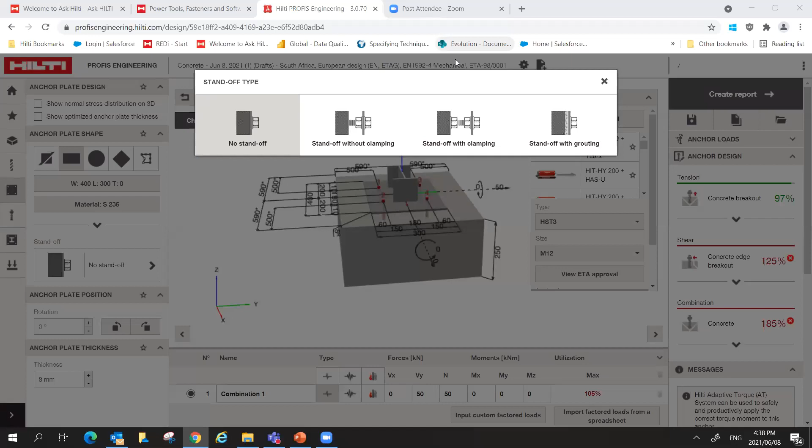It's similar to what I just explained now, so we kind of covered that. So you can actually now, and again, this is where the code evolved. There was a lot more safety factored into this when ETAG was the code across Europe. With Eurocode 2, you can actually change the compressive strength of the grout underneath the base plate, and this can help your design. But at the same time, it still considers it a moment.

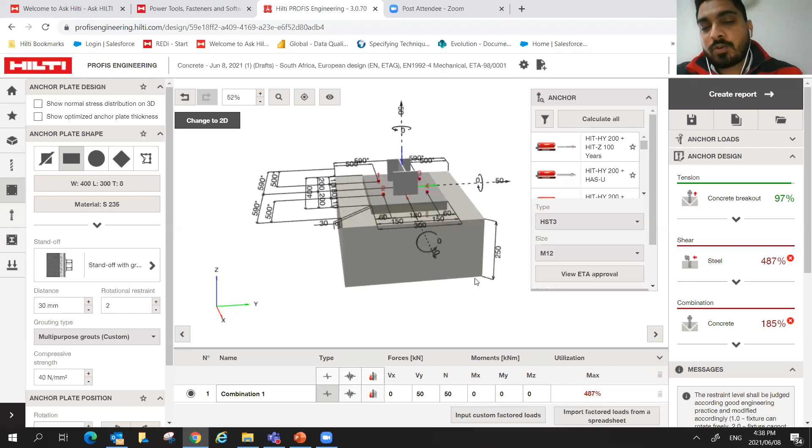And with grouts changing across the world, there's huge safety factors in the equations, or the calculations of this in place, that I would say leads to this kind of output. I often tell engineers, when it comes to grouting underneath the base plate, if they need to make an engineering judgment on that, if they're comfortable with the way it was installed, because the safety factored in here, when you look at the code, is more because of possible air voids between the grout and the base plates, and these voids can lead to massive moments being applied and bending of the anchors itself, which is a concern.

So if the engineer is comfortable with the way the grout was installed and the quality of grout that was used, we can make a judgment when it comes to these kind of aspects.